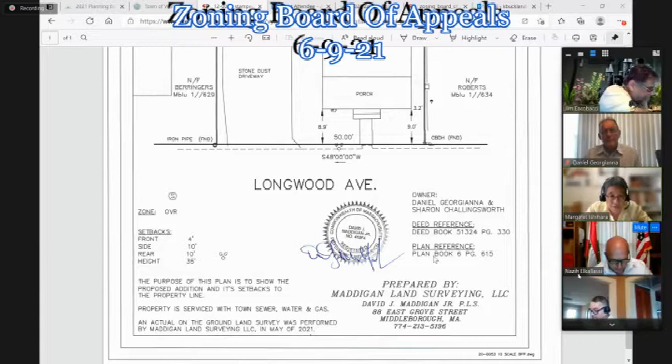The most recent plan revision that we've submitted consists of a surveyor's plan dated June 7, 2021, called the Building Permit Plan. I just want to make sure you have that in your packet. Then the other set of plans are the architect's plans, which have a revision date of June 6, 2021, and they coordinate with the survey plan that was just filed.

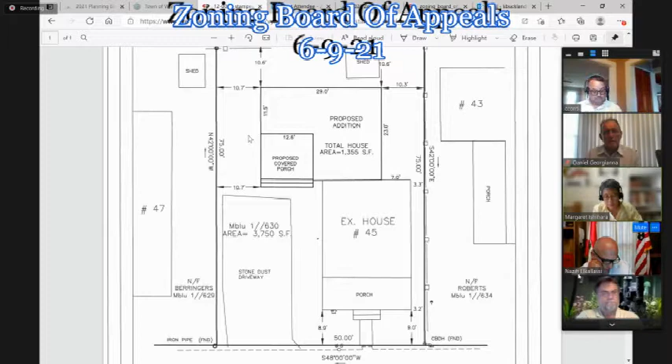Okay, yeah, we have that. Everyone has it? Yes. Okay, good. So basically, looking at the revised plans, there actually are two items that had been listed on the building commissioner's letter of February 8, 2021, the denial letter.

One of them has to do with the setback. This particular plan shows both side yard setbacks and the rear yard setback at 10 feet, so we've actually met the existing zoning bylaws with regard to those setbacks. That was done to address some concerns raised by board members at previous hearings, which I haven't been involved in. In order to do that, the proposed addition is actually slightly smaller than its original iteration—about 23 by 29 feet versus 24 or 25 by 30 feet. Not a huge change, but it's actually a reduction in size.

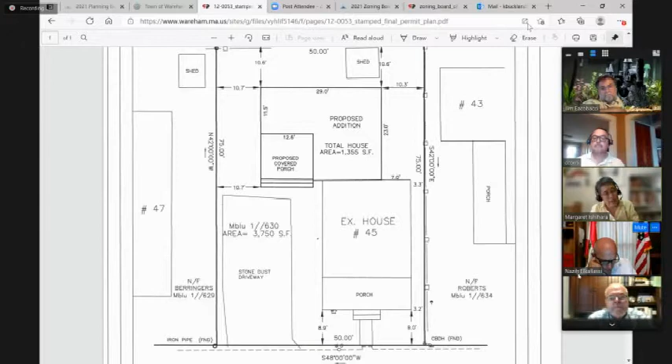The other issue, addressed at the previous meeting—which coincidentally I attended for another matter—has to do with the impervious surface permitted. The requirement in Onset Village 2 is 50%, and Dan Georgianna had actually done the calculations, I'm impressed, with regard to the impervious coverage. The figure on the table submitted at the last meeting is actually 41%, so we are below the 50% upper limit for impervious surface permitted.

With regard to the building coverage permitted, that's at 20%, so that will require a variance, as will the floor area ratio, which is permitted at 25% for this size lot. We're proposing, if you look at the chart that Mr. Georgianna prepared, it's actually at 48%.

But one of the telling things in his chart is that he compared to all the other abutters' houses, the existing houses on the abutting lots. There are, I think, 6 of them that actually have a greater floor area ratio. 4 have less, but not a whole lot less.

So our contention with regard to the 2 still outstanding issues requiring a variance is that this is being done in keeping generally with the existing situation in the neighborhood. It's not detrimental to the neighborhood. And because of the nature of this particular lot—being, as is common in Onset Village, a long, thin lot—this is the best way to site this particular addition.

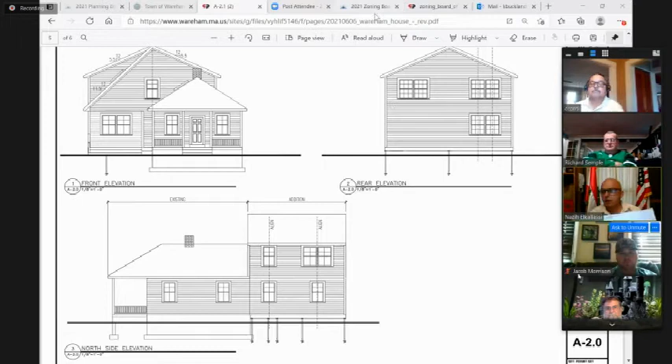All right, very well. Any audience, anyone in the public want to comment in favor or against? I'm Jennifer Hickson, 15 4th Street.

Yes, ma'am, thank you Mr. Chairman. I will not repeat all of my comments that I've said to the board. I know you've all heard it, and I don't need to waste any more of your time. I'm opposed to the variances. This does have a negative effect on my yard, as the house, even moved over further now, really affects my privacy in my yard. A couple of things I just wanted to mention about the letters. So the direct abutters, both of us had letters that were submitted that were opposed. We did not send any letters of people that don't agree with the plan that aren't direct opposition. I just don't think that's fair for letters to be included that are from all places in the neighborhood that can't even see the house.

The last piece was just that data chart. I can't speak to the accuracy of the numbers, but all the rest of our houses were built like 100 years ago, before there were zoning laws. And it is the reason, I think, why we have zoning laws to protect the community. So thank you for the opportunity to speak. I thank you very much.

There was a few letters posted on the website in favor of the project as well. If somebody wants to go look at the project, they were posted on the site. I do totally understand Ms. Hickson about, I mean, the laws are there for a reason. There's also a reason why the lawmakers create such a thing as a variance, because in most times, in a lot of cases, they don't think the law is fair for that particular parcel. And that's why they create such a thing as a zoning board that has the power to grant a variance. That being said, I thank you for your comment.

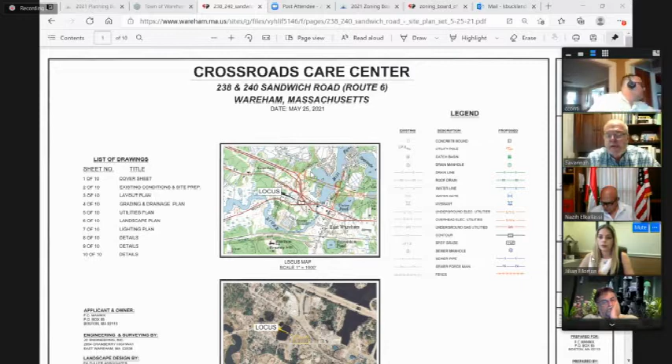Okay, why not keep it in the back, since it's a dead area there, and have more yard or something? Well, in going over the drainage calculations and everything, we're able to probably relieve some of the drainage in that area by doing it this way. We put a stone, you have that in front of you right now, a crushed stone parking area, a crushed stone paved area that'll absorb some of the water.

That's a pretty nasty area down there, at the bottom of that big slope from Route 28. We felt it's not a great location, and we could probably relieve some of that. It's not a swamp, it's probably very dry right now, but at times it gets kind of moist down there, and we thought we could help some of that drainage in that area.

Moving it over, we had a plan at one time to put the maintenance building closer to the road, but I wanted to keep a big grass area in front of that, as you can see from the plan, and we'll show you on the landscape plan when I get to it exactly what we did there.

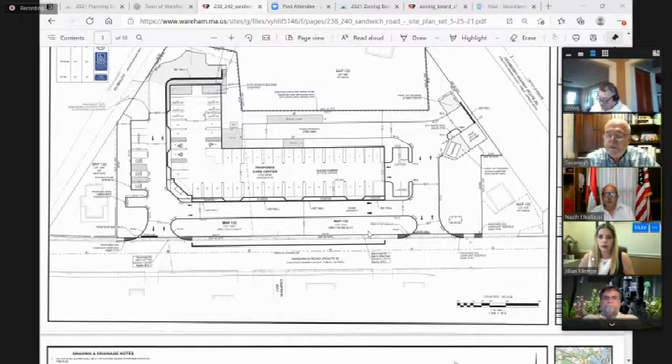I guess what I like personally, I'll run it by the board quick tonight. I would like to sort things out tonight with Mr. Rowley and Mr. Brad Bertolo from JC Engineering. But before we do this, they'll walk us through the plans, comments, complaints, whatever. I want to run it to the board quick if they want to iterate on a couple of things, and definitely we're going to talk about the variance after, but one thing at a time. So I'm going to start with Jim.

Jim, what do you think for tonight? We discussed the site plan. Yeah, fine. You good? Chris? Yeah, I'm fine. I'm a little disappointed we don't have a whole package here. Okay, well, I'm sure it's not going to finish tonight. So, but Jake? Yeah, that sounds good. Jake's good. And Richard? Yes, I agree.

Okay, very well. So I'm going to start if Brad shows us in, then we'll hear from Charlie, hopefully he had a chance to look at them and analyze them or whichever. So Brad, are you there? I'm here, exactly. All right, let's hear it. Brad, do you want to take over the screen?

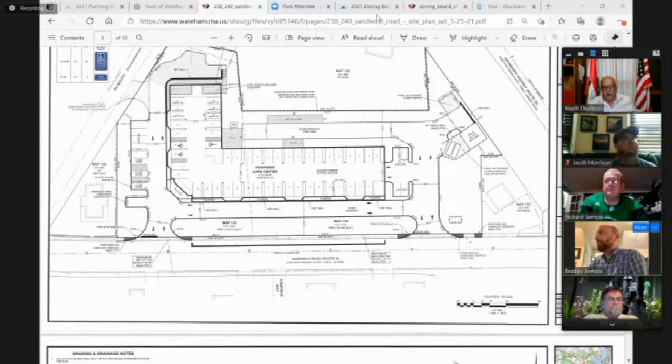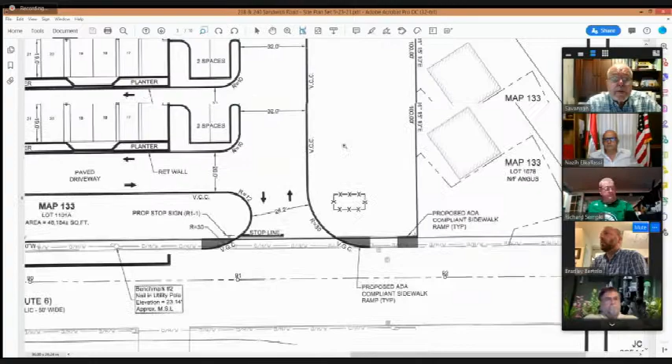That's fine, yes please, let's start with sheet 3, Brad. Oh, you have, okay. Well, I think, Brad, if it's okay with you, do you want me to just explain that design intent? Because we had some discussions, I know with Brian and stuff like that. I'm not sure, that would be easier, and at the same time I can point out when you're discussing. Is that okay with the board members? Mr. Chairman? Yeah, absolutely, okay, be my guest. So Ken, if you can bring that up again. Brad has it now. Oh, Brad has it now. Okay. All right, is that sheet 3?

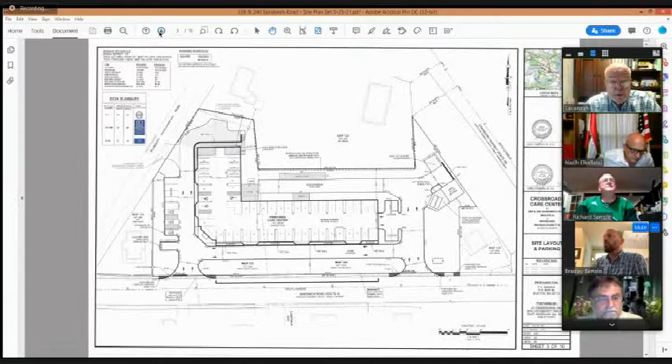Yes. So what we did, the first thing I want to start off with is it's been brought up before, the entire site, we've tried to maintain the existing grades whenever possible, and I think we've done a pretty good job with it. Basically, we've had to change some contours due to drainage considerations and some contours due to access considerations, obviously, and you'll see in the grading plan just exactly what was changed. But essentially it's pretty much the same. We're going to remove topsoil, of course, and bring back some good material, but you can see by the existing contour lines and what we've changed, it's been minimal. I think in the past we've talked about the building being entered from the lower side, so that there's really no much grade change to get into the parking area underground.

And then what I did, in the north side of the lot at the Plymouth Road entrance, we had a discussion with the Wareham Fire Department about putting in a gate, which they didn't want me to do. I'm harking back to the neighborhood on Plymouth Road and the discussions we've had about that access area. So we've left an emergency access road, a way to get in there for emergency vehicles, mainly the ladder truck, if it needs to get in there. They won't let me put a gate in, and I kind of agree with that. I can see why they don't want to.

But what I did was I eliminated the 4 parking spaces that there were in the prior plans, behind the building, if you will, on the north side of the lot. That whole area there, we put in some stamped concrete so that there's a good surface for an emergency vehicle to get in there if they have to get behind the building. But I picture that as maybe a little patio area, or just kind of a nice area for the residents to use in the future, especially with COVID and people eating outside.

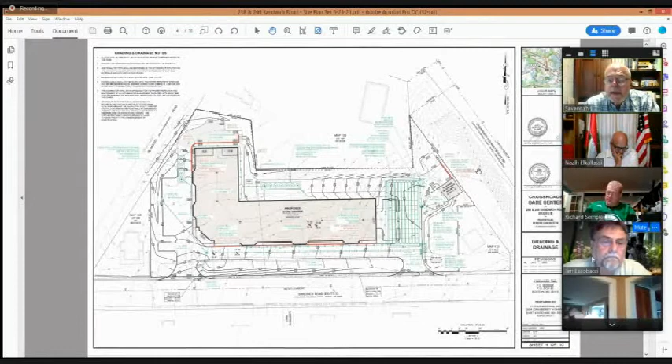So that's kind of a big idea we had for the back. The maintenance building, we moved that over, like I said, to make it a better area. We didn't change anything in front of the maintenance building as far as the turnaround for the fire truck. I added that little gravel area, whatever you want to call it, which gives us more ability to absorb some water in that area, and also to park a maintenance truck if they need to get out of the way. I thought it would be a good hardscape to have there, because it's kind of a low spot in the whole property, an existing low spot. There's really no way to get rid of it, because then you'd be putting water on other people's property. So the best way is to handle it there, in that way.

So that kind of, sheet number 3, shows you that change in the back.

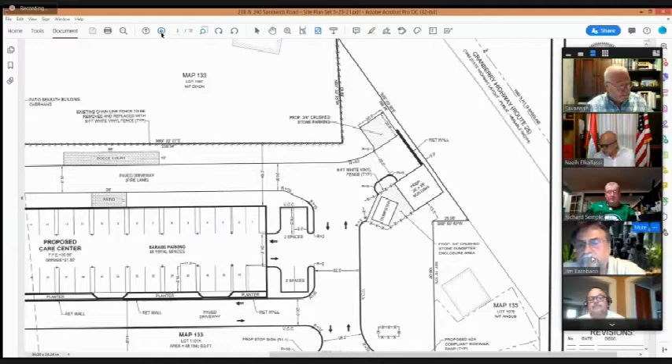And then we go to sheet number 4, which we briefly discussed. You can see it if you look at it more carefully. You'll see all the gradings that we've come up with and how it matches the existing contours. There's quite a bit of existing contour that remains, and Brad could probably explain it more with Charlie Rowley if he wants to, but I thought it was a good plan to show you the grade changes.

Right, Mr. Mannix, let me interfere a bit. So everyone knows this permit's gonna need a curb cut from the state, that's a state highway. I am aware of that. They might ask you, so just so everybody knows, you might come back and they might not allow you 2 entrances, which is fine, or just 1, it doesn't matter to us. But I know they're gonna insist on a 50-foot radius entering. They don't like the 30 entering, so you might want to check with them, Brad. When you're coming in, they like a 50, they don't like a 30 on the state highway. So you might have to shrink the island in the front and make coming in a place with the 50.

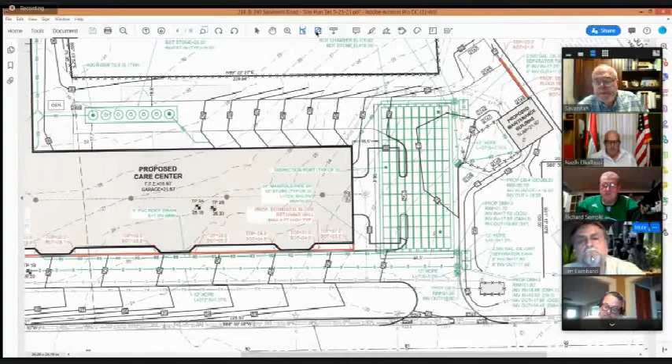And we'll see what the state says, but I think it might come up. Part of my, I'm sorry, I think it would be an improvement because I was looking at some paperwork or an illustration of the parking area, and it seemed like the turns for the fire trucks were real tight. So I do believe that could only help you in the long run. I think the state will require this. I've done a bunch of projects and they always want coming in at 50. You could leave with the 30, but coming in at 50. We'll let the state decide that. We'll talk about it later.

So let's keep going on sheet 4. Are there any other, I guess this is one of the reasons we want to go over this. Hopefully the drawings are fine as they are, if there's any comments like that.

I agree with you, Mr. Chairman, that we'll run it by the state. There are some existing curb cuts in the property, so part of my presentation to the state would be that we're eliminating some curb cuts and we'll try to consolidate some of the existing curb cuts that are there and confine it down to just 2.

Be aware that the state might come back and say they're not giving you 2, they're giving you 1. Well, I don't think that matters to the board. We'll ask the board what they think. I believe I've considered that, and I believe it would work with 1 because of the radiuses, but we'll play it by ear and see what happens.

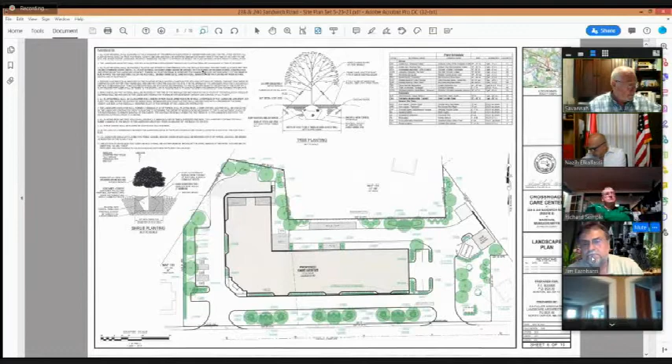So that's kind of the site. The next thing we could talk about is sheet number 6, which is the landscaping. To try to make it quicker, we got the landscaping plan, which I don't expect everyone to comment on too much at this time. I want you to look it over, and I think Mr. Rowley would look at the landscaping plan and have some comment on it. But I think the landscape architect has done a great job.

What I want to point out is not only the extent of the landscaping on this plan, but the choice of trees. I've done some research on the trees. We've got a lot of trees that, at maturity, would end up 50 feet high. Most of the trees along the property lines are tall trees, maples, great looking trees, and they'll almost make the building disappear.

As far as the neighbors on Plymouth Road are concerned, there's going to be a lot of nice trees and plantings. We also had a comment at one point from the building commissioner about a buffer zone. There's only one area there, on the side of the building near Plymouth Road where there's a house, and we put trees about 45 feet tall that spread mostly on the property, with a whole bunch of arborvitae screening to make sure that area is well screened. We also put some screening and some nice trees over by the side.

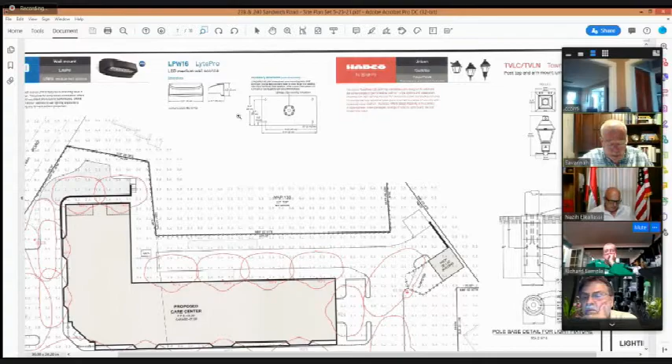It's pretty self-explanatory, but all the lighting, according to the lighting consultant, is to remain on site. There's very little spillage, if you will. If you take the lighting plan and look at the landscaping plan, you'll see that there'll be very little interference in the neighborhood with lighting, and that's the whole idea. But we feel that this will be good looking and it'll be safe. You've got to have enough lighting for safety and maneuverability, but I think he's come up with a good plan there.

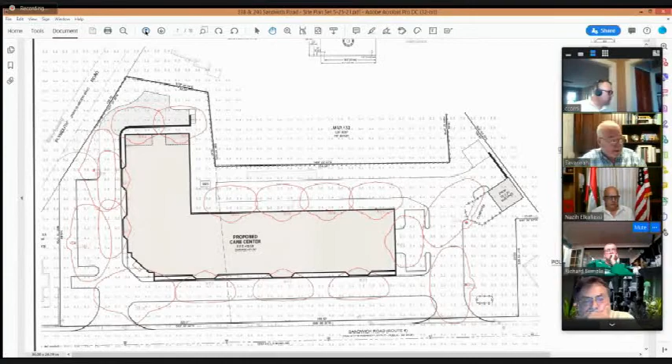And I guess those 4 sheets as part of the package are something that I hope, if there's any comment to be made, as to my design intent and what we've come up with.

I think JC Engineering's come up with a good job on the drainage, and by the way, we do have full drainage calculations based on these plans. If it's only some minor changes that come up tonight, we'll make them. If not, we're ready to submit these plans as part of the package, and maybe even before the package, if Mr. Raleigh would like to see them sooner.

Okay, Charlie, did you have a chance to look at those? Mr. Chairman, I only picked the plans up today. This is the first that I've seen the plans, so I don't have any real comments tonight. I'm going to have to go through the plan set and do my report as I customarily do.

There is one question that I have. Maybe the plans are available just to compare. Going back to the elevation views of the building, looking at the building from Sandwich Road, do the elevations of that building sort of conform to the current grading plan now that you have? Yes, they do, Charlie.

We didn't change anything basically on the site plan from what was submitted before, except for relocating the ambulance. Most of it was a result of comments that were made, and then the latest thing I came up with was the parking in the back.

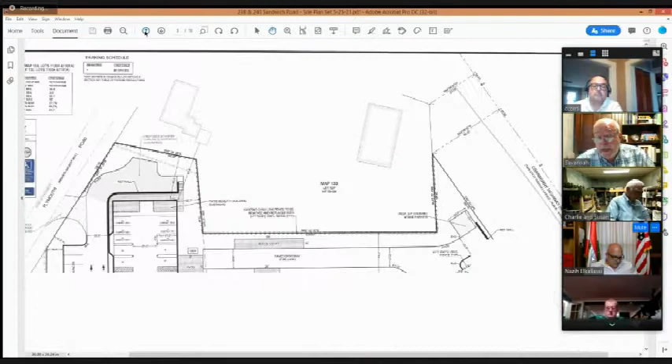Okay, that's okay to know, but my concern was whether or not you have a copy of the elevation plans that show what the face of the building looks like.

If they haven't changed since day one, if you've got a copy, you could give me a PDF on it. I don't think it's gonna change because they still have a good 8 feet from beginning to start, so it's still gonna look like a step, like a basement.

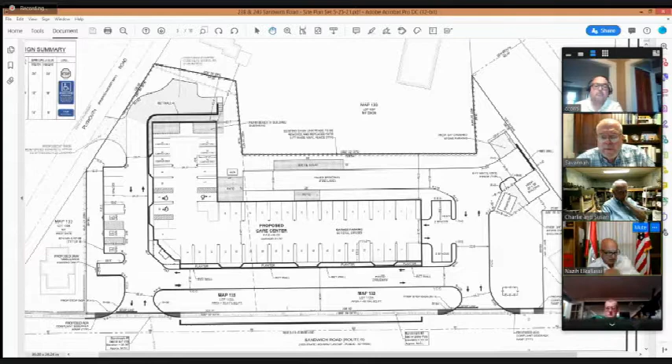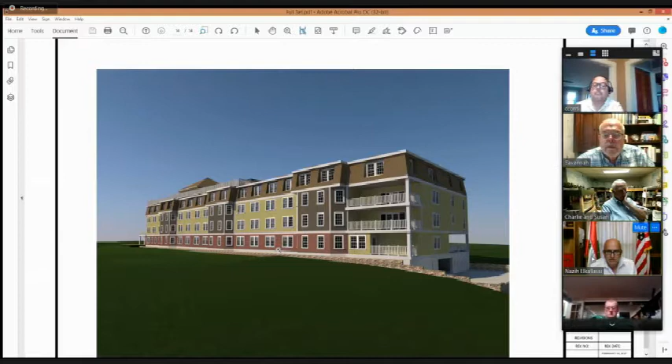Well, I understand that, and I just wanted to compare it, because to me the grading plan and the site plan as a whole works with the building, and it's part of what you need to make a determination on with respect to the variance. So when I'm looking at that plan and the change in grading, that doesn't work, that's nowhere near what the grading plan shows. So I will be comparing the two.

Mr. Mannix, you've gotta give the site plan to your architect and draft this facade accordingly, so it's gonna look pretty much like the steps at the end. You definitely get 8 feet difference on your grade here, so you definitely have another floor showing or less showing. Do you know what I'm saying?

Well, I know what you're saying, but I'm looking at the drawing, and it shows the site dipping down, it's not that sharp. You can see there's a retaining wall. I'll compare them. This is why I wanted to get this drawing in, because it's a civil engineer's drawing. We haven't combined the two of them together.

I wanted to. There's no way that facade will fit in that site plan. No way, there's no 8 feet in here. With all due respect, I know you're building, but there's no way this fits here. I think it's a whole floor. 8 feet is a whole floor.

The other part of it too, Mr. Chairman, would be that the site plan really doesn't reflect what the site will look like, because there's a driveway right up against the face of the building, and some other features that would be part of what you actually would see. This is a very clean, neat, simple drawing, but it does not reflect what the grading plan shows or any of the details of the site plan. So it might be good to incorporate some of that, so you get a better sense of what the variance request is really for.

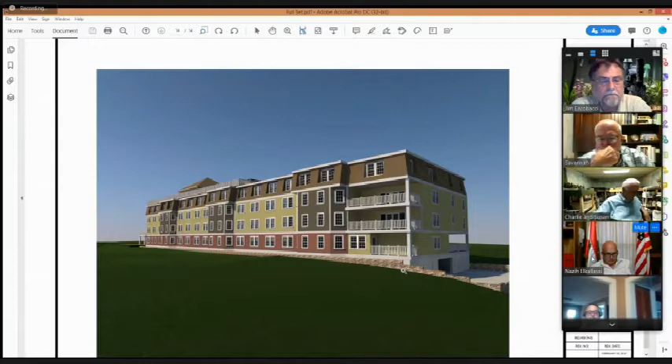I don't expect any kind of detailed information on it right now, but what does concern me greatly is the number of parking spaces on the lower level below all of the living space, with only one entrance in and out. I don't know whether the floor plans reflect any kind of exhaust system that will be necessary, because you cannot have a buildup of carbon monoxide in that area. So I'm not after an explanation now, but if it hasn't been thought about, I think that's very important in terms of the overall concept.

Yeah, absolutely. But that's something when the architect brings this down, they're gonna get a mechanical engineer, electrical engineer, and all these issues are gonna be addressed, and the building commissioner has to approve. I think it's out of our jurisdiction anyway. It's a building code matter, but it's definitely gonna need a mechanical engineer to address these.

And whatever, I'm sure they're gonna have drafts, fans, and they might need to inject some oxygen at the end, that's a long stretch. I don't know, but that's up to the mechanical engineer who's gonna do that.

Well, if it turns out that it's out of our jurisdiction, that's fine, but I just feel it's an extremely important issue that we don't want to make any sort of comment or recommendation on this without knowing that that's really been looked at, and that some sort of approval isn't given on the assumption that that will happen.

Maybe when they get into it in detail, they'll find they'll have to revise the parking plan or revise something. I have no idea. Right, there's no way to try and second guess it to begin with. So I'm only pointing it out as a real concern at this point without sufficient information to know exactly how that'll take place. Well, I guarantee you the board isn't gonna make any comments on it.

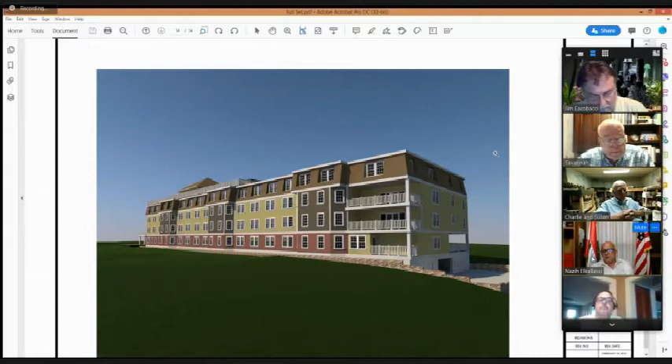Let's... I'm not... Sir, listen. Mr. Chairman. I'm not gonna... Please, I don't allow this on this board. Okay, let's not point fingers, let's work positively here. We're not gonna point fingers, it's not the place, especially a project like this. We're not building a fence here. So we're not gonna have he said, she said in this project.

So that being said, I'm gonna start with the board and see how they feel about it, and we're gonna talk a little bit quick about the variance. Jim, what do you think, buddy?

I'm happy. I'm fine with everything I've seen this far. As everybody knows, I'm fine with the project overall. I agree that what's on the screen right now, the color picture, is conceptual, it'll look something like this type of thing. We need an actual front, rear, side, north, south, east, west elevations. Yep, we need to see them. I get it. Other than that, keep on plugging.

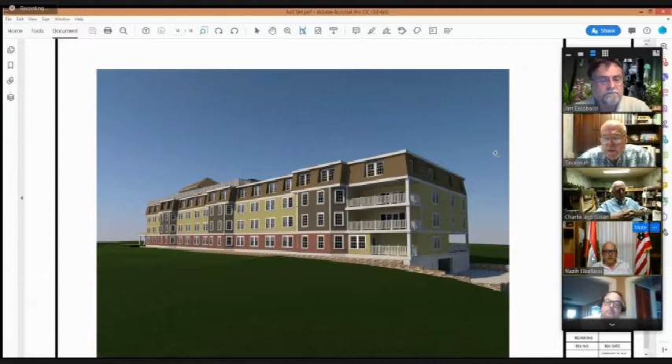All right, Chris, what do you think, bud? I think we've been going at this since September 23rd, and it keeps going on and on and on. We keep postponing it. I'm very disappointed that we didn't get a whole set of plans. I think the building is way too massive. As I've said before, I don't know. Now we have a different use. Before it was assisted living, now we're doing a care center. So I guess I'm not sure what the rooms are, we haven't seen floor plans. It's just, I don't know.

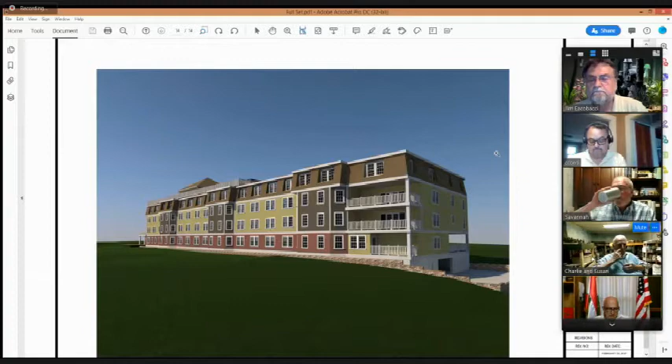Right, let me explain something. We didn't postpone. The applicant came, I have to admit, he came in good faith and presented his thing, and he wanted input. So it went back and forth. It's not like we drag our feet or the applicant dragged their feet. So then we asked him to do a site plan, which he did. I think right now we're in the right path. So I think this is good, we're doing the right thing. The applicant hopefully goes back to his architect, give us, apparently he's listening to this, and the site plan looks good.

We're gonna hear from Mr. Rowley next time. We need definitely the buildings, layout, the room sizes, the final details of the facades, the entrances, all these things. So this is the architect's job to do.

Richard, what do you think? I'm fine right now. Everybody's pretty much covering the concerns. Thank you, all right, very good. And Jake? Yeah, nothing at this time. All right, let me jump quick to the public. We haven't asked, if anyone in the public wants to speak in favor or against this project, is anyone here? I hear none. All right.

That being said, so let's make a plan here. Mr. Rowley will look at this next week. He will look at the calcs for the drainage, and he'll come back to us on that matter. Also, Mr. Mannix will be working on the architectural plan for next time we meet.

Now we want the attorney to talk a little bit about the variances, the two variances. I believe I'm all for the maintenance building for that variance. Well, let's discuss the two variances one at a time, so we're gonna do the easy one right now.

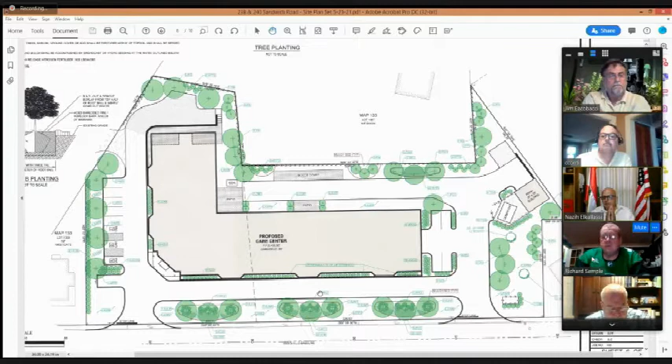How does the board feel about this one, the maintenance building? The applicant is asking for a setback variance. How does the board feel about this one, Jimmy? Are you good with that? Does it bother you? No, you don't like it? Because of my local knowledge, don't forget, for some fifteen years I was the manager of that little Upper Cape Realty office. I know the land there as well as anyone. So I have no problem with that building sitting there. I understand what's between that building and the highway. It'll be fine there.

Okay, just for some knowledge, it is the highway. If there was the railroad track, just keep in mind, there's no setback. He could have just put it right on the border. But because it's the highway, I guess different rules apply, it's a 10-foot setback.

So Chris, what do you think about that building for a variance? So you're talking about the 3 feet from the highway? Is that the variance right there? That's not from the highway, that's from the border, the property line. And then the other way, 13 feet and 3 inches. That one complies, the other one complies. I guess I got no comments on it right now.

All right, Richard, what do you think of that? Fine with it. Very good. Jake, what do you think of that?

No, I don't have a problem with it. I don't either. So I think this is for us, the board, pretty good with that variance.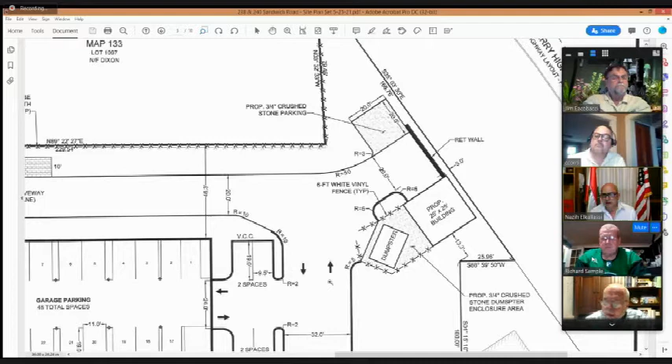Now the biggest variance, we want to let the counselor walk us through it again, and let's talk about the solarium variances. Counselor, I want you to iterate, make sure, and maybe with the help of Mr. Mannix, that the height of the building without the solarium does not require a variance. Am I saying that right, Mr. Mannix? I'm sorry, the solarium does require the variance.

The building itself, without the solarium, complies, right? The building itself was calculated by JC Engineering using the existing grades. And the building itself, I believe, is at 36 feet at the top of the roof line there.

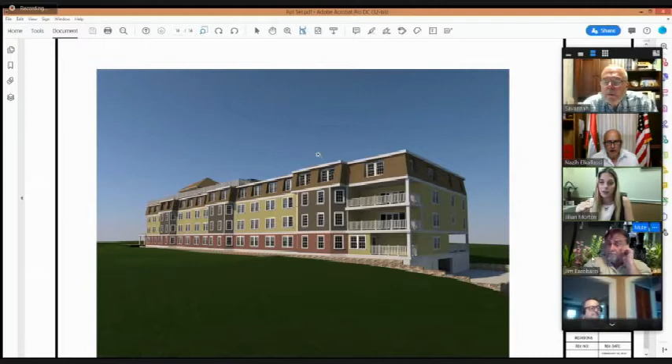Okay, where, and Brad has the pointer. All right, Brad, what's the height over there? What's the maximum? 35, is it? 35 or 40? 40 feet. If you recall, Mr. Chairman, back when we were in person, do you remember that picture? I believe it's in your materials online as well. It was green, yellow, and then kind of a red rendering of the building, right? So we saw that by right, the green met the threshold. When you added on the solarium, that's where we're seeing it exceed.

All right, so my question right now: without the solarium, it does comply, right? Yes. Okay, so let's talk — not that we're going to decide, but let's get everyone educated about the solarium and the variance, and let's see how the board feels about it.

So, Counselor, you want to talk about it, or Mr. Mannix? Well, I just want to make one comment. I think you have all that in your materials, and we discussed this initially regarding the statutory requirements. I can go through them: the site having the topography, the soil conditions, the interesting grade, and the need for this space. So I can go through the legality of each point on the variance, but I know Fred, the client, knows a lot about the solarium and its importance. So you can go ahead, Fred.

Well, with regard to the solarium, Mr. Chairman and members of the board, I'd like to refresh everyone's memory. You'll have to excuse me on the actual percentages, but it's a very small percentage of the roof area that is the solarium, and that solarium is going to be maybe 6 or 7 feet above the 40-foot height limit. The thing that creates the more outstanding, outrageous height, is the tower itself, which is a very small part of it. We feel that's a nice area where you get off the elevator to go to the solarium, assuming we can have a solarium. You get off the elevator and it creates a nice big open space.

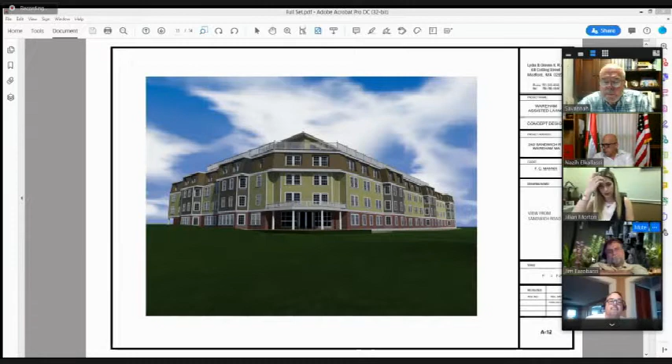I'm going to start with Jim. Jim, what do you think? I think I've pretty much telegraphed my opinion that I'm not only in favor of the solarium, I really hope internally that the solarium variance is granted. I think it's a great amenity.

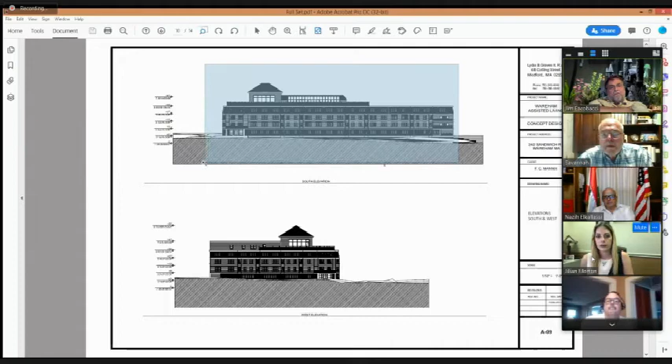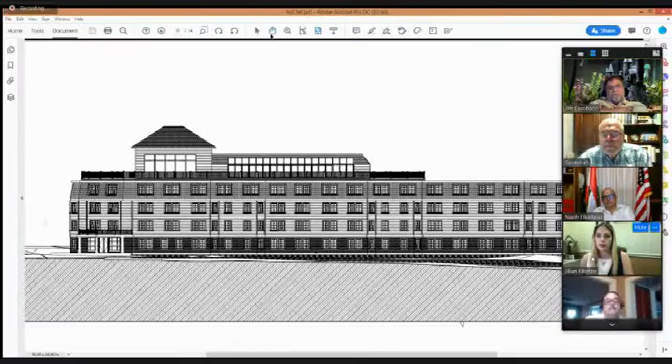I want to use the term forced perspective. When you walk down Main Street USA in Disneyland or Disney World, they change the height of the buildings to make them look taller. In this instance, we could use forced perspective in reverse, the way it's set back from the edge of the roof, using the angle and the fence, that little fence to keep people from jumping off the roof.

That's four feet, that's at the 40-foot height, and then you set it back and cut the angle. I have absolutely no problem with the solarium. Again, like I said, I just hope we can come to a consensus where we allow it, because I can envision being in a facility like that, and what a nice amenity that would be.

All right, very good. Richard, what do you think, Richard? Well, I kind of thought we were on the right road where Mr. Mannix was saying that the trees would hide it and basically make the building go away. I know there's some concern with the other board members about the height on it. I understand you think it's nice looking and all that, but I see a lot of other windows on the right side of the solarium.

I think there's a lot of light that's going to be let in there, and it just seems to me that for this whole project, if you did away with it, we wouldn't even be talking about it, and it would make everything easier. That's what I have to think about it.

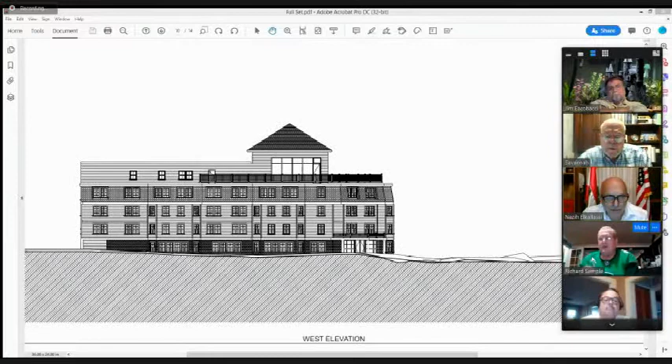Okay, that's perfectly fine. Jake, what do you think? I really like the solarium. If this is a place I was going to go, if I was an older person, that's something I think would be great for people. They can't get around a lot, so it's a place they can get away to without having to go far. So I really do like that for sure.

I think without it, it would look very boring, and it wouldn't be a place that I would want to go or send my grandparents to. They just shut down a place in Wareham, a nursing home. So we need a place like this, and this is a really nice place. Eventually it will get there.

Okay, very well. Now keep in mind, Mr. Sample sits on this matter. If Veronica comes back next time on the Mullen Road, she could re-engage in the hearing, and she hasn't missed a hearing on that, so she'll be voting, but I'll take Mr...

Conti's comment on it in case she doesn't show up next time. Sure. Chris, what do you think?

So the variance, I guess 40 foot is permitted and they're asking for something like 69 feet. So they're asking a variance for 29 feet in height. To me, that seems like kind of high.

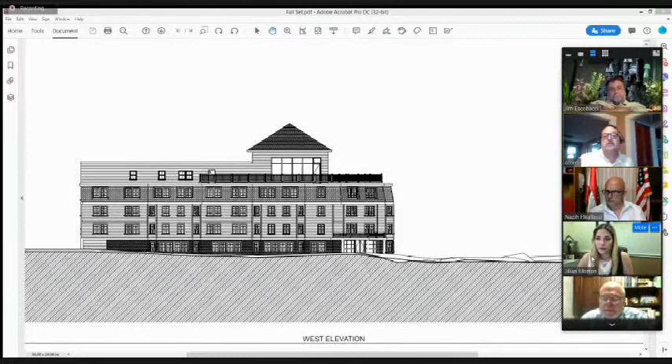I love the idea of the solarium, don't get me wrong, I think it's great. I think it'd be great for older people and all that. I'd like to see them lose a floor and bring the whole unit down. That's my comments on it.

Let me ask, where is the 69 feet, Mr. Mannix? Is that the tower? The way the town of Wareham calculates, they don't use the average on the gable, they use the highest point of the roof. So where Brad is putting that hand, that's the height.

That's 69 feet at the very top of the tower. Okay, if you go down to the plates, what do you got there? How high is that? What's the pitch on that, Brad? It's almost a 45-degree pitch.

It's probably 10 feet high, you know.

I wanted it to look like a steeple, that's why it's like that. It's not a flat roof. It kind of hides the elevator overtravel, all that stuff is behind it.

And when you're inside, I believe we have submitted a drawing or a rendering showing the inside of that space. I think it would be a nice gathering spot for people.

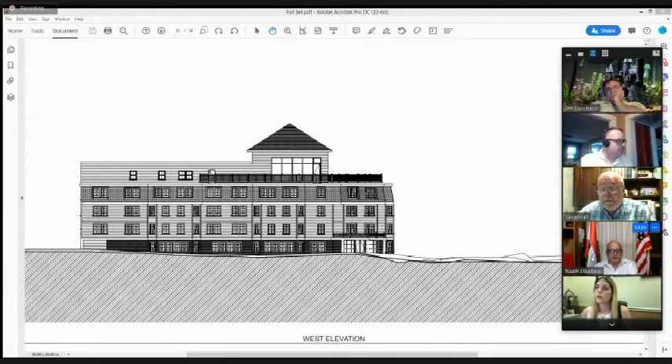You know, COVID, as far as I'm concerned, I heard on the radio that it went away on the 30th. But if it ever comes back, that's a great spot for fresh air and to gather. It's kind of hard to find a gathering spot with an 8-foot ceiling with all these viruses going around, and I thought that'd be a good spot for people to meet, greet, and gather.

Well, I hope it doesn't come back. But anyway, I guess the bottom line on a variance is, if it's a special permit and you bring a 5-foot or 10-foot opening, we have to give it to you. A variance is a matter of opinion. If you get 4 votes, you get the 4 votes. If you don't, you're out of luck.

So that being said, I guess right now it looks like you have 3. And if Veronica comes in, we don't know which way she's going, apparently. Hopefully next time your argument will carry. Right now it looks like it's carrying with me, Jim, and Jake. Richard and Chris is not sure. So we're definitely gonna argue it again next time.

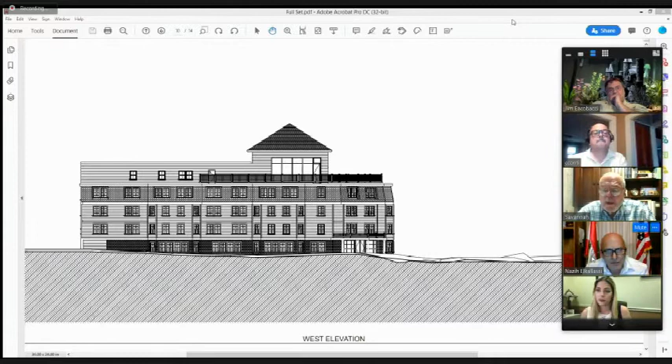Mr. Chairman, could I ask a question about this? If I wouldn't be out of line, when I looked at the information submitted previously, as I recall there was a letter from Attorney Nancy Angus citing some issues with the variance. I was wondering if Ms. Morton had a chance to look at that letter and if she had any comments about it.

Yeah, I believe that was submitted. Let's see the date, I'm just looking through materials online. Yeah, it was quite a while ago. I haven't heard her speak on here.

If they want a presentation regarding the full variance on the height, I'd be happy to do that. I would prefer to do that with Ms. Devanese present, so I could speak on that next time, Mr. Chairman.

Yeah, absolutely. I do recall Mrs. Angus coming here, she commented and she was against the variance, and her claim was against the hardship, which is obviously one of the rights. She can definitely exercise her right and appeal under Section 17 of 40A and appeal the variance.

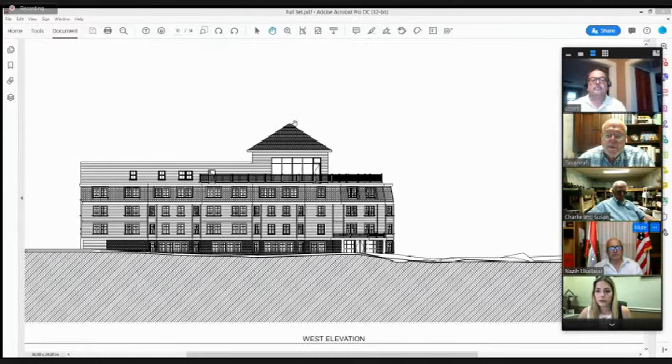We hope if the board grants the variance it doesn't go that way. But if it gets appealed, we don't know what happens, whether it gets remanded to us or gets denied or upheld, who knows. So we'll see what happens, play it by ear.

So what are we sending the applicant with tonight? So apparently we need a drainage calc, and for Mr. Rowley to look at the site plan. We need a very, very detailed architectural plan for next time.

Maybe you could play with that, whatever you call it, the roof, for the variance. I don't know, cut it down a little bit, make it flat. I like the gable, I like the hip area, but I don't know. Like I said, you have three people, if you need to gain one vote, maybe I don't know how you can play with it, whatever you have to do.

Like I said, with the variance, if the board gets two no's, it's a no. And if it goes to court, most likely you will lose, unfortunately, in this matter. So let's see what you could do, have your architect play with that. I know Ms. Devenese last time recommended that you put the solarium in the middle of the top floor. I don't know if that's feasible for you, if the numbers work. But let's see some more detailed plans for next time.

And before we send you away, does anyone, the board members, want to add anything? One more comment from me. What's up, buddy? Go ahead, Jim.

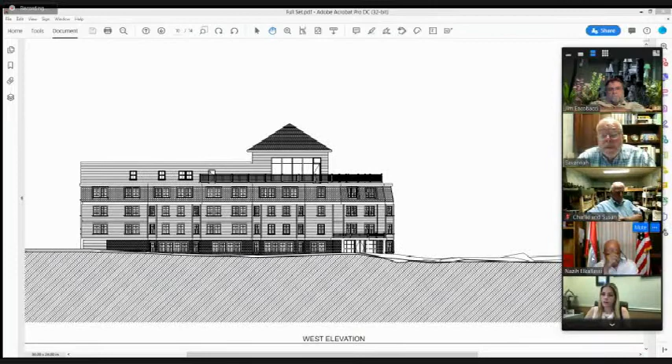The other thing is with the tower, I'll take a look at what you're talking about, and that'll take away some of the mass. Those rooms aren't really necessary. The bathroom, it'd be nice to have the bathroom there in the back, but maybe we could make that a lot smaller and have a head house for a second means of egress from the roof. That's another reason it was stretched down there, if you look, there's a set of stairs.

There's a second means of egress in the garage that Charlie Rowley pointed out, with a set of stairs going down into the lobby and another set into the north stairwell. We could handle that. I think you're required to have something — if you have people outside on the roof deck, you need a second means of egress from the roof. So there's a little door right behind the bathrooms for ingress from the roof deck to that stairwell. That could easily be handled with a head house back there — just a piece to cover so you don't get water in the stairwell.

And maybe that does create more mass above the 40-foot allowed height. That could be something to consider.

I would really like to see the solarium, and the kitchenette and the two bathrooms, not placed in the lobby. I like to keep the lobby wide open because it looks good and makes the building look a bit better from a distance. The solarium is there for health reasons, for people. You've got three activity rooms there — you might be able to get by with one or two, and make the head smaller.

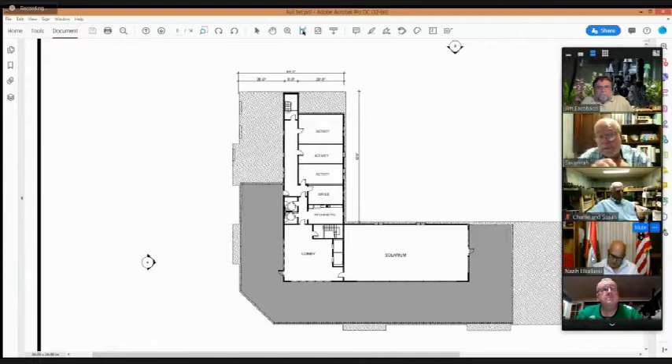You've got the elevator over-travel, which isn't counted in the height, that always sticks up. Since something's sticking up there anyhow, I figured I'd make a feature of that tower. If you look at the square where it says lobby, that's what I'm talking about — the tower, and you see the two elevators in that drawing. The solarium is a wing off the tower, and the bathrooms and that little kitchenette could be cut off at that point. It wouldn't affect anything — I have room in the building to accommodate some of the other stuff.

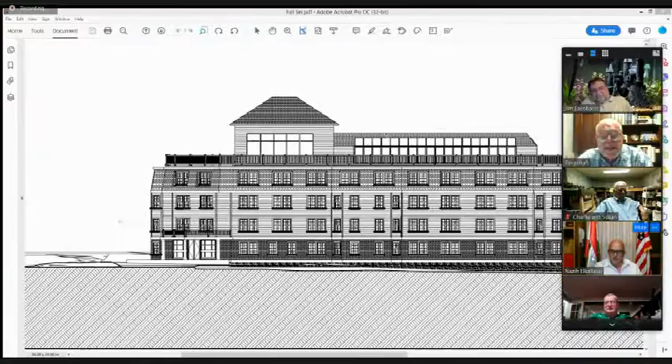Richard, let me ask you something — Fred, what's the height you have on full 8-foot ceilings on these floors? Yes, 8 feet. So 8 times 4 is 32 — plus the 1-foot joist, so 36. And plus you have a couple of feet for the elevation.

34 feet, 47 — yeah, she's got 66 feet for the tower roof. I thought it was 69. I could have made a mistake, but I'll check into that. We gained 3 feet there, you chop another 3. Well, if there's an error there, she might have lowered that down a little bit — that's why I say the tower might have been a little bit higher.

Again, if you go a couple of feet at that peak, to me it doesn't make a lot of difference as long as visually it looks good. But that's just me talking.

As you can see on that elevation, the height of the solarium roof is 47 feet, so it's 7 feet higher than the allowed use.

If we cut the tower off completely, I don't think that would be a big deal, but I don't think it would look as nice when you get off the elevator. It's just kind of a feature, it's nice up there, it's got some windows in it. It's a nice place to gather. Not everybody is going to sit in the solarium, but there are people that will like to sit around and stay out of the sun. So that'd be a nice spot.

Let's see what happens for the next hearing. If the board is more lenient for you to take it off and stay at 47, they give the variance, I guess that's what you're gonna have to do. Well, whatever, if not, they might say no for the whole thing as a variance, but we go from there. So let's play it by ear till next time.

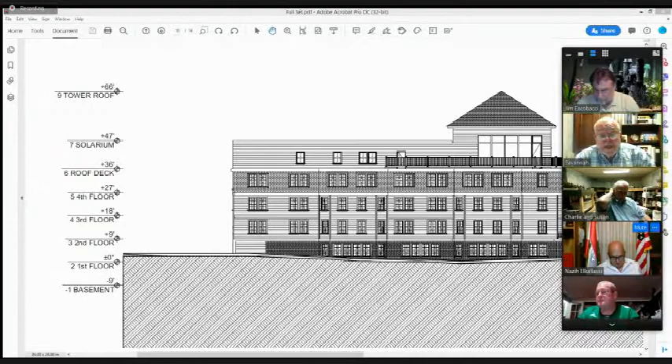Right, I would say submit your plan, we gotta start somewhere. Oh yeah, no, I can submit the plans, I don't know, in the next 3 or 4 days. I'll have my architect make sure that everything is correct. I'll look at the 66 feet, make sure that's correct.

Yeah, and submit your stormwater and all this stuff. Work on it with your architect, I mean, we gotta really start moving on that project. Okay, right, well I don't want to do it piecemeal. I have an impact statement based upon what I heard tonight that I'm gonna complete, and we'll have it all into you as soon as possible.

Hopefully in the next week to 10 days. You got to have some time to look at it. I think the board has had some time to look at the plans. Charlie hasn't had time to look at all the plans, but I'll get them to him as soon as possible.

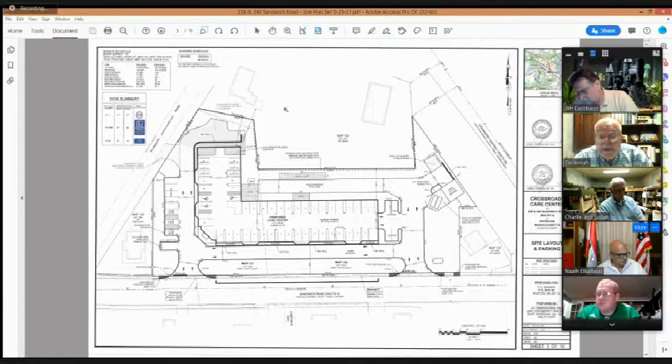I can get you - you're here on the Zoom meeting, Charlie. If you want me to, I can submit the civil drawings to you first. No, I already have them, I picked up a large set today at the town hall. Oh, did you?

So I have that, and a PDF of the drainage calculations were sent to me. One thing I remember, though, and I don't see it on the plan because I haven't had a chance to really look—where's your sewer connection going?

It's on the utility plan. What's happening is we're going to have a force main going up Sandwich Road to... Brad, help me out. What's that, Tony's Lane? Not Tony's Lane. No, we're going up to the next manhole, there's a manhole further up.

Well, that's going to be in the state highway, will it not? So you're going to need a permit to do that as well? It'll be in the state highway, or I don't know if we can put it in the town way in the sidewalk, I don't know. It's only a 2 or 3 inch main. Yeah, but that's a state highway there, that's Route 6. So if you're going to need curb cuts for the entrance, you're probably going to have to get them to approve any cut across the pavement.

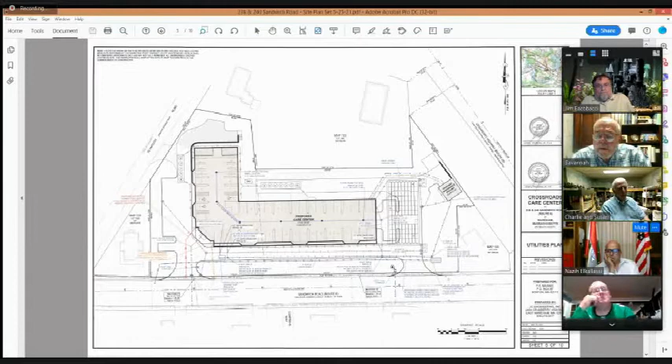It looked to me quickly that there was a force main running right across the street, so just make sure you include that. And if there's any other details not included in your civil set right now, that needs to be submitted so we can take a look at it. Because I assume that'll have to go to the sewer commissioners as well, or at least to Guy Campina. Well, Guy's aware of it, we gave him a concept plan.

Brad, maybe you can comment on it, I think you did that one. Well, it's gotten to the point where it needs to be the detail plan now. Well, as Charlie's saying, you definitely want to include it with your permit when you do your curb cut. I would include gas connection, electrical, water too, because any of those you're gonna need a state permit to do, so I would do them all at once.

So it doesn't delay you. Well, yes, but I think what I'd like to do is make sure we have a project before we apply to the state. I think they're gonna ask me if I have permission to build a building there. So that's one of the things. I realize there's a lot of submittals that have to take place. I can't get a building permit without any of those things, and if I can't get a building permit, the building can't be built.

I agree with you, and I hear you, we're working on it, but quite frankly I don't feel I should be doing something based upon what might happen. If the board has to decide and review the site plan, the town has to tell me if I can get permission—not to build a building, but permission to apply to build a building.

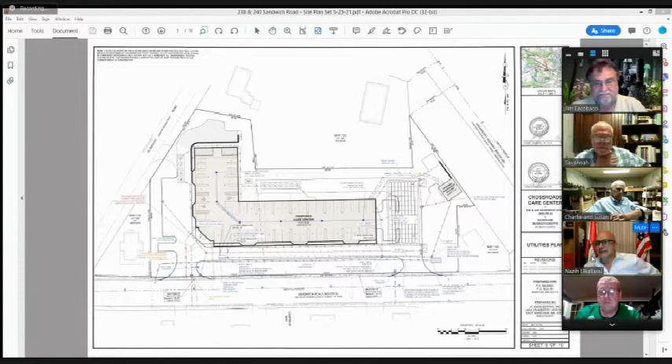All right, so that being said, is the board okay that we continue this public hearing the 23rd? I have a question, Mr. Chair. Yes, go ahead. This says that the site plan review variance is due by June 19th.

Okay, so we're gonna need a written notice for the decision, counselor. When would you like to continue that to, Mr. Chairman? I would do the 23rd - let's shoot for July, give it to July 22nd. Okay, all right, July 22nd.

And we'll just go before my birthday. And we'll make a party - bring the cake.

All right, that being said, can we get a motion to continue this matter to the 23rd? So moved - we have a motion by Jim to continue on the 23rd. I have a second. Okay, I'll second that - second to continue. All in favor, say aye. Jim, aye. Chris, no. Richard? I can't hear you, Richard. Aye. Jake, aye. And myself, aye. It carries.

So we continue until June 23rd. We'll see you guys then. All right, thank you very much. Mr. Chairman, will that be in person?